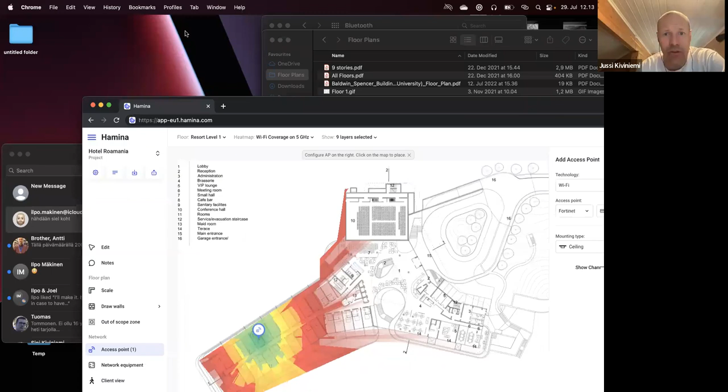So let me just share my screen, and maybe we can work so that I will create a project from scratch, or even a couple of projects from scratch. And anytime you have any questions, feel free to ask, please, because that's how this probably works best. Feel free to interrupt me at any point. Feel free to ask at any point. Okay, so...

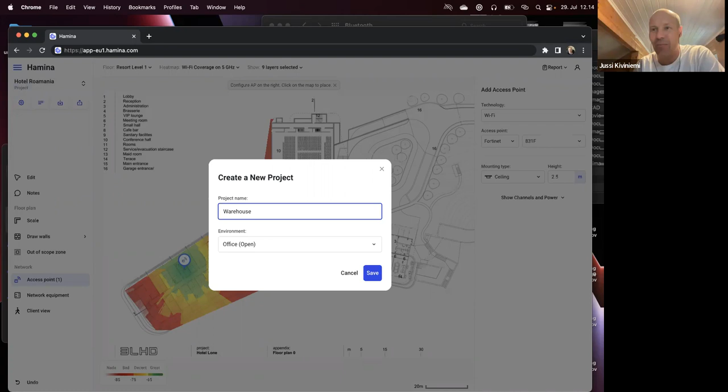I'm assuming you can see my screen, and I will start with tabula rasa, a new project, and we can go from there. We could start with a warehouse, because warehouse gives you a lot of different things that we can show, and then we could also take a look at more like a corporate, typical indoor environment, so that it represents more what you guys do. But let's just jump first into the difficult end and make a simple warehouse plan, and then we'll go from there.

So it's a browser-based tool, it's easy to share projects with other people, for example, for your colleagues. And then you can also, if you only want to share in a read-only way, you can create reports as well that can be either web browser accessible dynamic reports, or Word or PDF documents as well. So to be clear, you don't have to install any software.

You just open a browser and go to hamina.com, whatever, and log in and then start working online. Absolutely, absolutely. And actually, if you go to this URL, you can do that even now. We are in kind of a closed invite-only beta, but if you know where to go, you can actually go here and get your access to the tool.

However, it will have very limited functionality until there will be a button here called Upgrade Now. So if you click Upgrade Now, you just pay 390 euros for the 6-month use of the Wi-Fi planner product, since I'm assuming you may not need 4G and 5G. So 390 euros gives you 6 months full access to the full tool per user. So it's not very expensive.

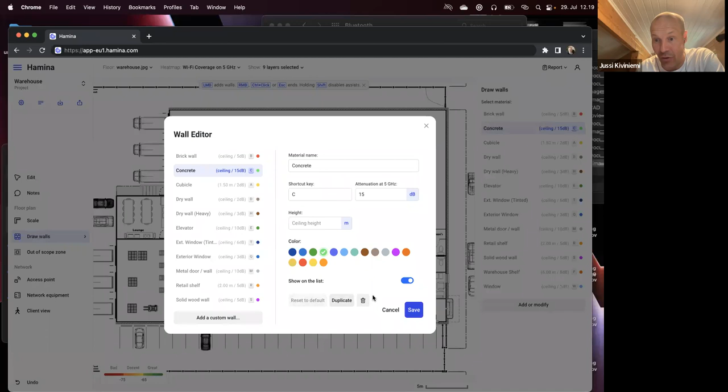Then I can choose the wall materials and start working on it. The wall materials can all be modified—height of the walls, attenuation of the walls, things like that. It all can be fully modified there.

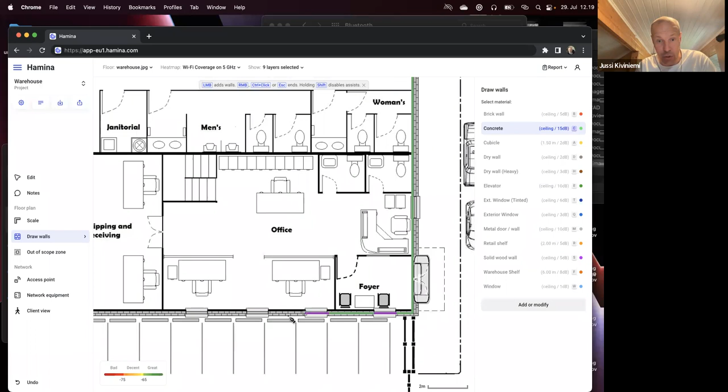If there's different materials here—say there's concrete until here, then this is solid wood, then this is concrete—I can switch between materials super quickly just by clicking these keyboard shortcuts, which can be defined. For example, I press S for solid wood, C for concrete, S for solid wood.

This allows super quick definition of the wall materials. Also, as you can see, this actually snaps to different angles, making perfect 90-degree turns—even finishing up here ends up a beautiful 90-degree turn.

Let's say I draw this line first here with drywall—I hit D to start drawing drywall. I draw a line here, and I want to continue at the exact same place. You can see there's an assistant that tells you your previous wall was there, so it creates beautiful, absolutely 90-degree angles, making this super efficient—clean looking, but also super fast to draw.

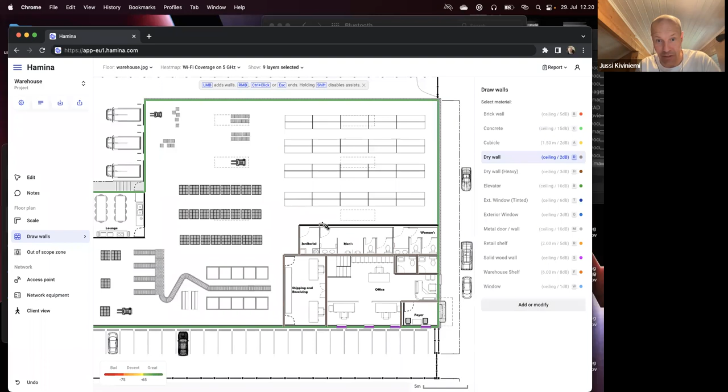So I claim there isn't a faster or more efficient wall drawing tool out in the market than this one. I'm just going to do a terrible job at this right now, but you get the point, right?

So we have some walls defined, and maybe we'll put some here as well to the lounge. Again, you can see how it grabbed here automatically and helped me connect beautifully. Okay, that's done. Then we want to draw some of the shelves, which are thicker than the walls.

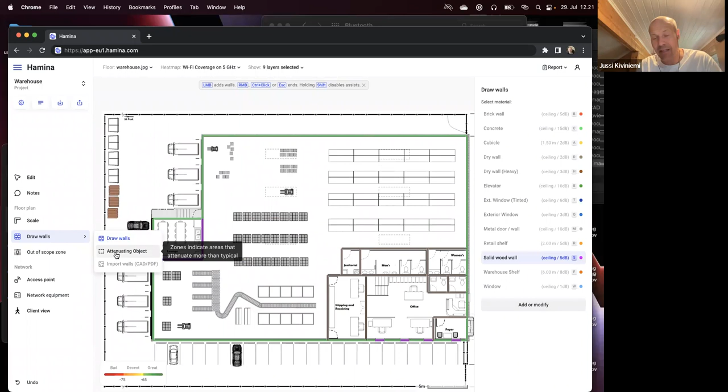So instead of drawing walls, I'm going to do attenuating objects. Let's say we have two heights of shelves here—these about 8-meter warehouse shelves, but let's say we also have 4-meter warehouse shelves. So I'm going to duplicate this material as shelf warehouse 4 meters, give it a shortcut, and give it a 4-meter height instead, maybe a different color too.

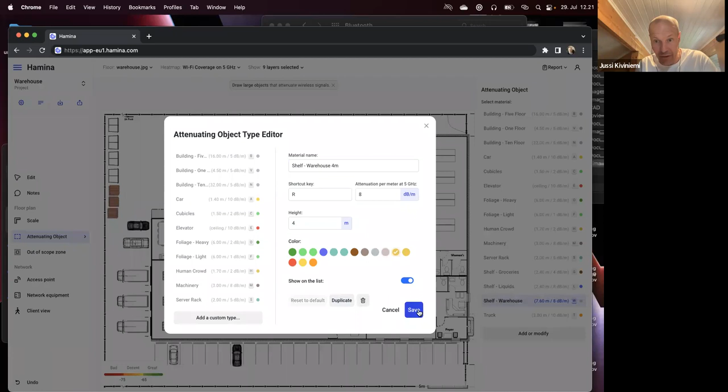Now we have two shelves here that we can use. I'm going to do the 7.6 meter shelves here, and again you can see how it snaps beautifully to the previously drawn shelves, making them very nice. If I want to zoom in—this is at 50 frames per second all the time, although it doesn't show online—it's very, very smooth to do all this drawing, zooming, panning.

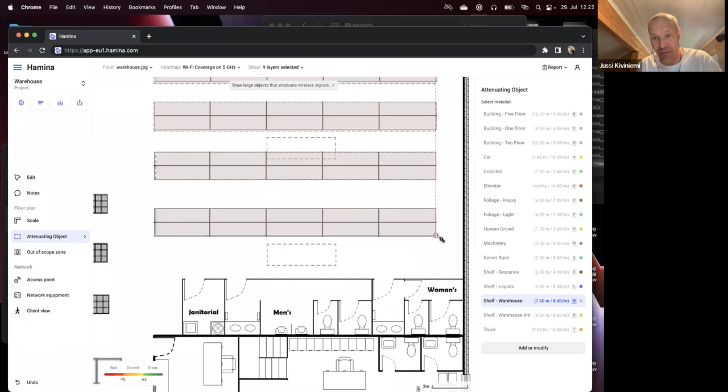Then I'm going to press R to go for the 4-meter shelves and draw a little bit of those as well. There we go. Okay, and then here a couple of shelves, and then maybe these guys are 4 meters roughly as well.

Then I'm going to do the trucks—I'm going to press T to draw the trucks, because we have a requirement, let's say, for outdoor coverage too. So I'm going to draw these trucks here to make sure they don't block too much signal as we do the outdoor planning.

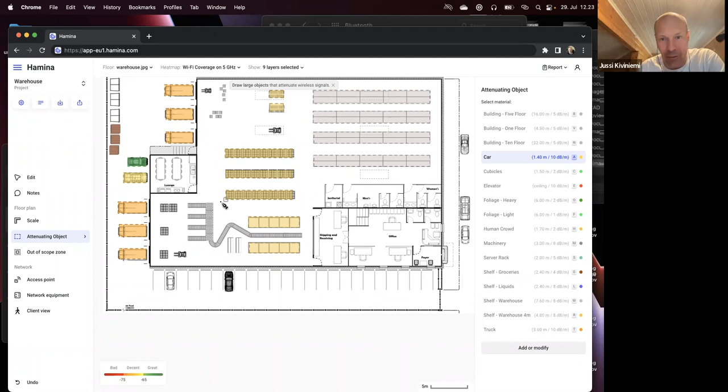All right, and maybe even the cars, if we so desire, not that they would block that much since they aren't that big. You have 4-meter cars in Finland. Was it 4 meters? But remember, the car is only 1.4 meters, and the truck was 3 meters. These are not station wagon Volvos, these are normal cars. All right, here we go. So that's that, and now we've modeled this to a pretty decent degree.

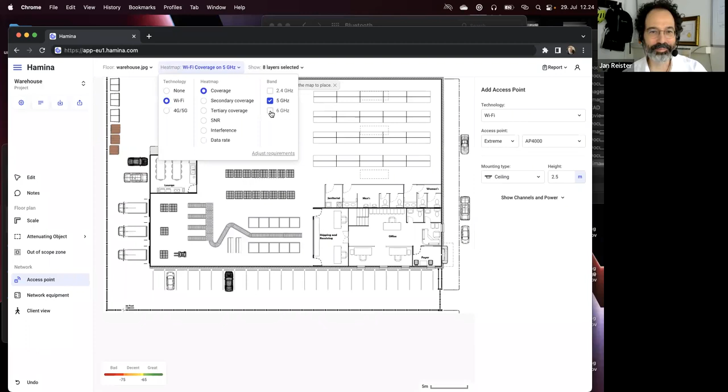So I'm gonna just hide the attenuating objects as well, and then I think we're ready to start placing some APs. Since Jan works with Extreme APs, maybe we could first start with the offices and place some 6 GHz capable AP 4000s there. The 4000, yeah, the latest and greatest, unless you have the 5000, of course.

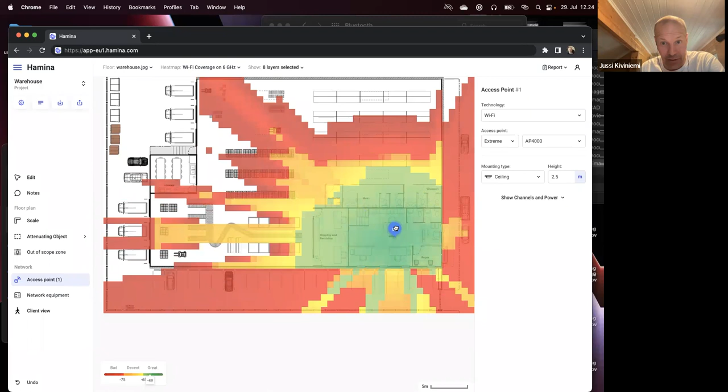We're going to look at 6 GHz coverage for Wi-Fi. There we go, and of course you can see how the walls attenuate the signal, and the shelves here attenuate it even more. Let's put one in the middle of the office, then another one in the lounge office. But of course, we will need something for the actual warehouse space and outdoor areas too.

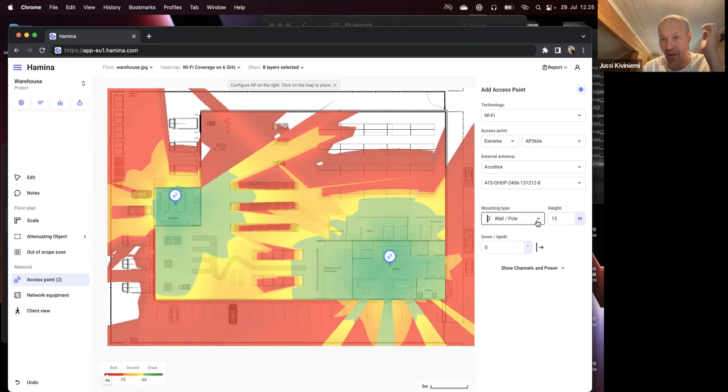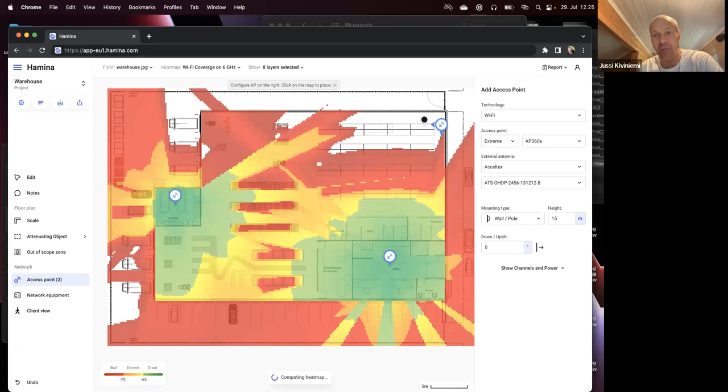So how about we use, I'm not an expert in Extreme APs, but the 360E sounds like it has an external antenna. Yeah, and then we're going to put it at, I don't know, 15 meters height or something, because we can only mount these, let's say, on the walls in the warehouse. So we're going to put one here in the middle of the shelves, and then we're going to point the antenna. But then we see nothing from this AP. Why is that? Because we're looking at 6 gigahertz coverage.

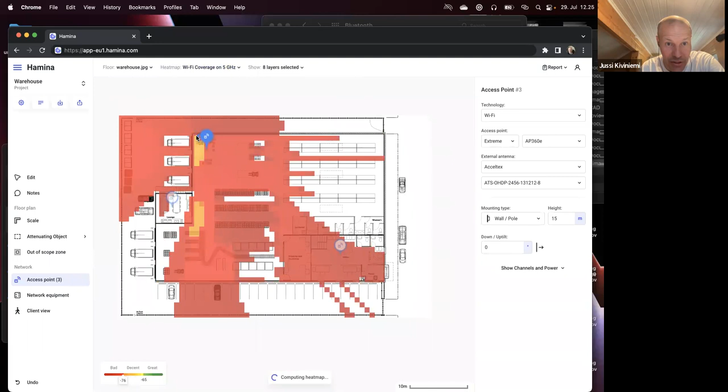So let's look at 5 gig instead, and we can see how this AP shoots down the hallway here. Let's make a bit more illustrative example and move this AP to the corner here where we don't have so many shelves. But don't we have to add an external antenna to this one? I mean, it actually defaulted. Okay, to one of the Acceltex antennas. Great, exactly. So see, when I chose the external antenna AP, it actually gives you the options immediately. If I use an internal antenna AP, it doesn't ask at all, because you cannot use external antennas.

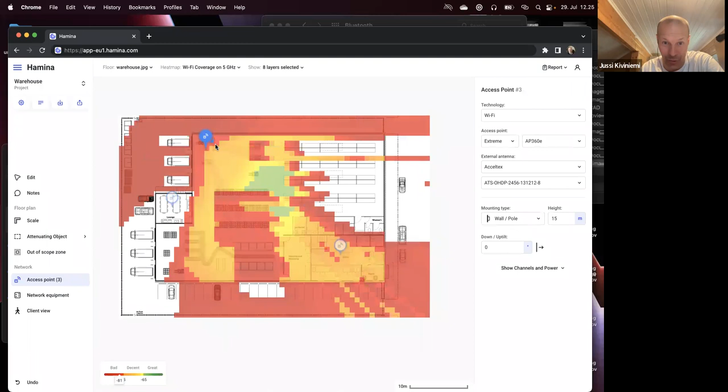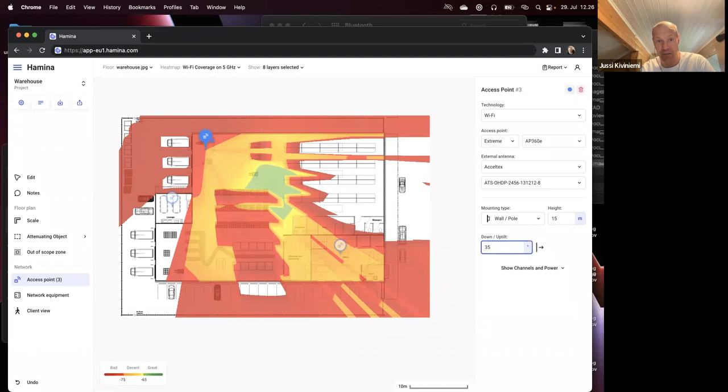And now we can see that since it's at 15 meters height, it actually flies the signals. If it's placed sideways, the signals fly way too high. The signal is great at the ceiling, but it's not great at floor level. So let's give it some down tilt, like a 35-degree down tilt, so that we actually get a signal right below the AP. There we go. Now we can see, sure, the shelves, because they are 4 meters high, remember, block a little bit right behind the shelves, but then again, after the shelves, it starts to look good.

Visualizing coverage for a single AP is pretty easy, you just click on the AP and you can see the coverage for that AP. If we want to see the coverage for 2 APs, hold down Shift, and there we have coverage for 2 APs. If we want to see the coverage for all APs, click anywhere to deselect, and now we're looking at the coverage for all of the APs, all right? And then if we want to...

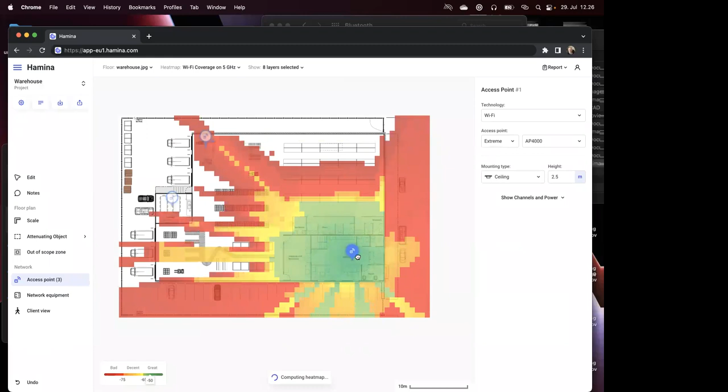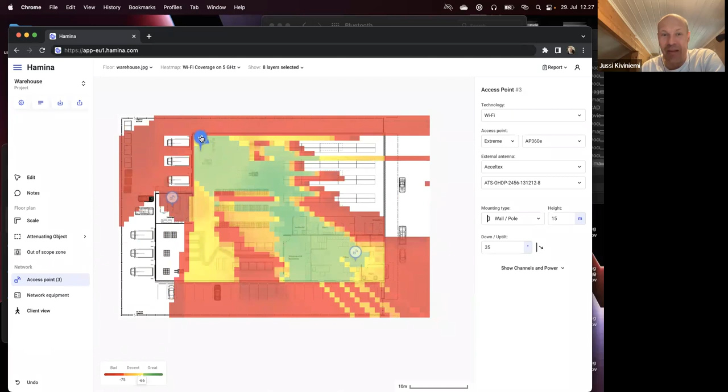Yes sir, sorry, Alessandro speaking. I see that the access points are positioned at 15 meters, or that one, yes? Yes, absolutely, 15 meters, that means like three floors away, upwards. Okay, yeah, I was thinking this is a very high ceiling warehouse. Okay, so that's why I placed it at 15 meters. Okay, thank you. Yeah, of course.

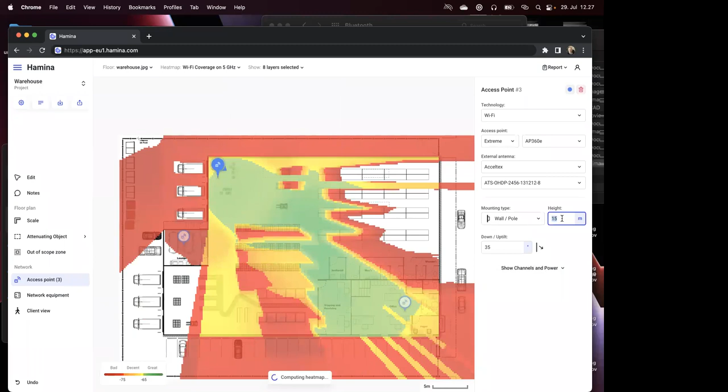And we can put it lower as well, of course. Let's put it to 9 meters. There we go, and then we could reduce the down tilt a little bit. You can see the down tilt arrow here, so it shows which direction it's shooting at any given point.

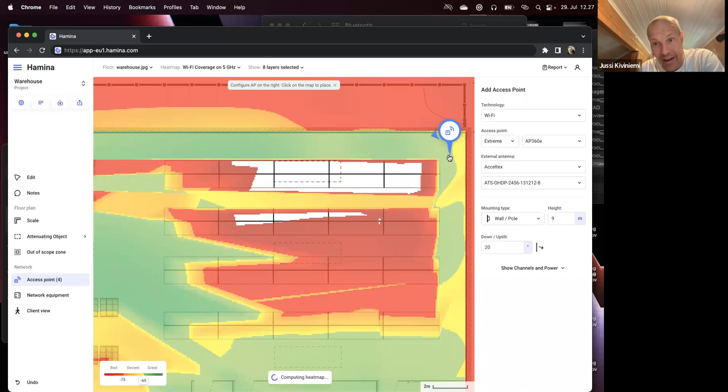Let's place another access point of the same kind, maybe here. And we can see, yeah, the shelves actually block it quite a lot, but if we zoom in, we can see that the signals go between the shelves quite nicely. And as you can see, it recalculates the signal, so even if we zoom in heavily, it still shows crisp and clear heat maps.

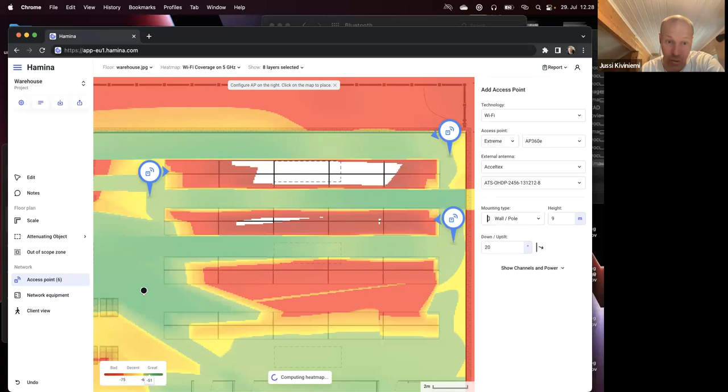So let's put one AP there, one AP again there, and point it that direction. So it remembers the configuration of the last AP you placed, 20 degrees, correct, down tilt, etc. Exactly correct. So now we're starting to see, okay, that's actually looking pretty good.

All right, and of course we can reconfigure any of the APs. We can move any of the APs anywhere, and it gives you an immediate, rough estimation of the coverage. And then if we want to see all of them, that's how you do it.

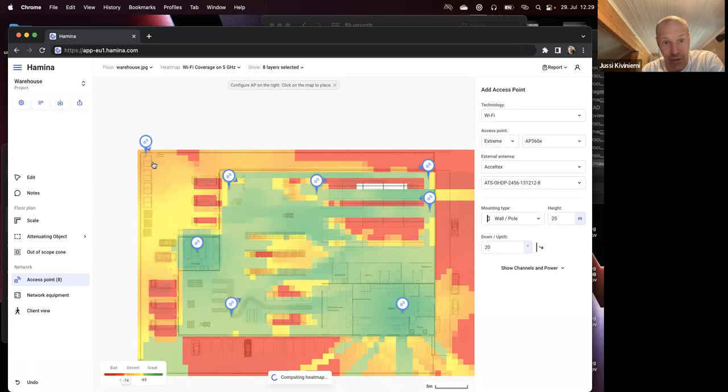And then if we want to place one outside, maybe on a pole at 25 meters, we have a light pole here we could put one on to ensure outdoor coverage. Maybe we want to tilt that down a little bit more since it's so high. There we go, maybe even more down tilt.

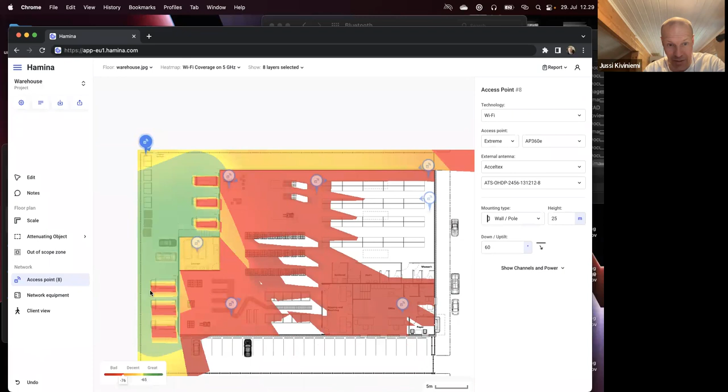Now it covers the yard beautifully. Shoots in this direction, gives a 60-degree down tilt. Right behind the trucks there's a little bit of shadow, but it's not that bad. We can see behind the cars there's just a little bit of shadow, but that doesn't mean anything because the cars are so low anyway. So now it's starting to look good.

And then if we agreed with the customer that only the left-hand side yard needs to be covered, but the other areas not, to get rid of some of the unnecessary heat map, we could say, okay, together with the customer we agreed that the scope of the project is this, so we can draw some kind of polygon here and say we are only interested in this area. So now that's what we're calculating only. It excludes all of the rest.

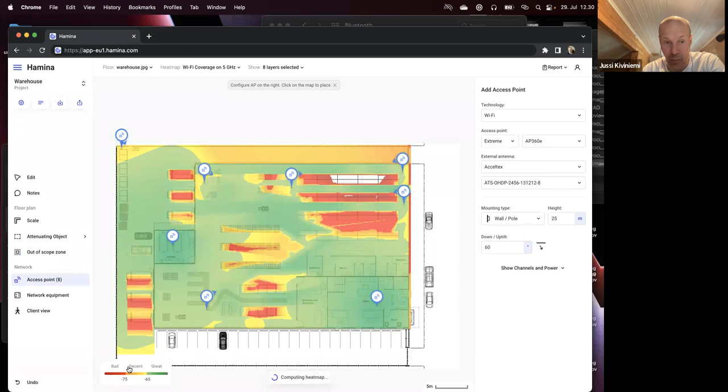And in terms of requirements, we can also adjust all of the heat maps. We can define limits, like what does green mean, what does yellow mean. Great. And this was my next question.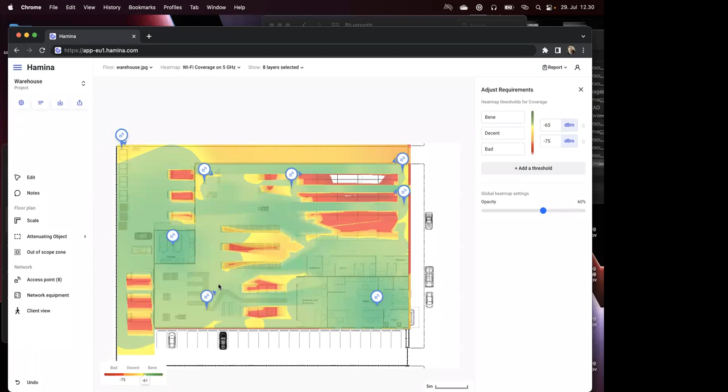And if you want to rename these, that's definitely there now as well. And if somebody is reading the report, they can also see your customizations for the values. And wherever you move the mouse, you can see here also the exact value of the signal.

We can see the signal, we can see where he's connected to. We can see that he's actually quite a bit connected to 2.4. We may not want that to be the case. So what do we do? We could just say for all the APs, let's reduce the 2.4 transmit power a little bit, for example.

The problem especially seemed to be with these guys here, meaning the high-placed APs. So let's drop the 2.4 TX power down a little bit and increase the 5 GHz power a little bit.

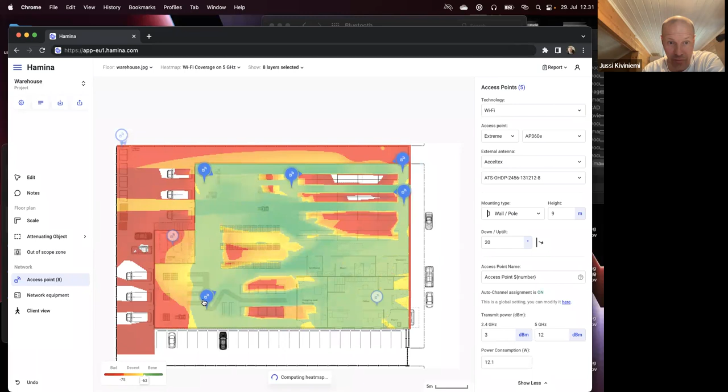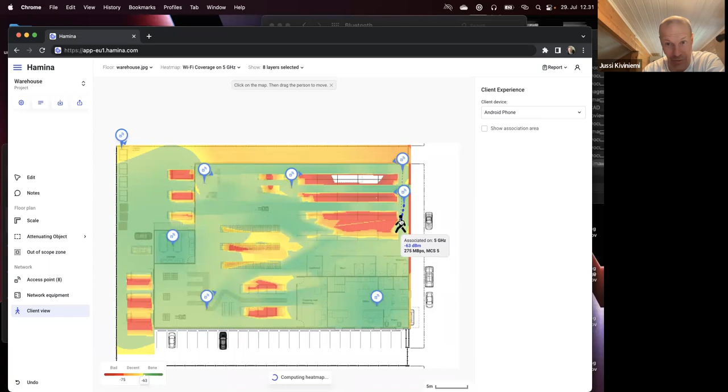And this happened only for the selected APs, which were the indoor directional antenna APs. And now let's look at it again. Now the client is actually associated to 5 GHz, which is exactly what we want. We want as little traffic on the 2.4 GHz as possible. And of course, we could just disable 2.4 altogether if we wanted.

Can I hide the heat maps? Yes, absolutely, let's get rid of the heat maps. Okay, that's fine, great. And now what we can show as a heat map, if we want to analyze the roaming, is the area where the client will stay associated to this AP here.

So it's associated to this AP, and if we actually drag the person somewhere else, like now it's associated to this AP, how long will it stay associated to this guy until it roams again? So if we go here, we can see now it roamed to this AP, and it will stay roamed to this AP unless the user again walks to a white area. Like, let's say he enters this room, and now he associates to the AP obviously in the room.

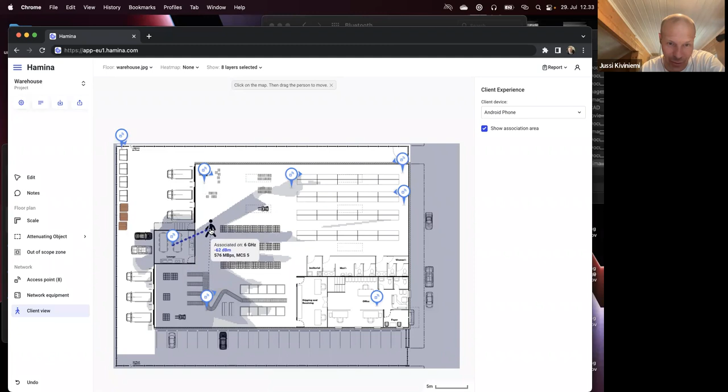So this is a tool for designing for good roaming, but also a tool to understand how the network will actually work and explain to your customers. Explain to the boss who pays for the network, like how is the network going to work? Well, here's how it's going to work. This is you walking around the network, blah, blah, blah.

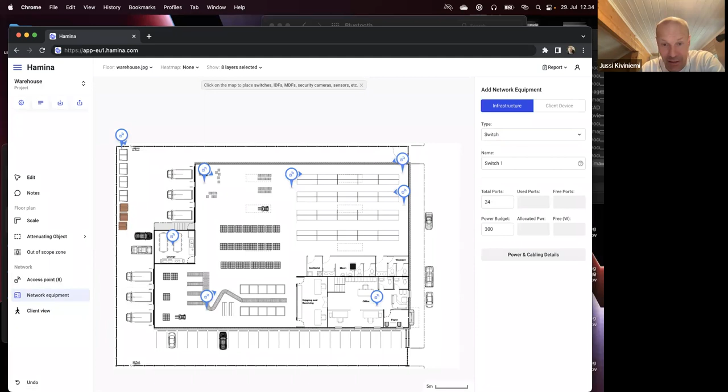All right, and then if we want to also design for switching, things like that, we put a 24-port switch or even a networking closet like IDF, MDF. But let's say we put a 300-watt 24-port switch here in the janitorial area. The tool automatically pulls the cables to the APs and gives a little bit of slack based on the height of the AP and stuff like that. And then we can see how many ports will be consumed, how much power will be consumed based on the actual PoE consumption of all of these APs.

So for example, if we change all of the APs to AP4000s, it will take more PoE power. And then we can see for the switch, for the site, like all the switches on the site, all the APs, the cable lengths, the power consumption. As we can see, the 4000s consume more power than the 360Es, for example, how much cable you will roughly need, all of this stuff.

Is it possible to control the cable path? For example, I know there's a conduit and it's actually a different path than the one that is depicted here.

That will be possible in the future. Everybody asks for that as well. So absolutely, we will make it. Because, you know, I could really propose this to a colleague of mine who does cabling and nothing else. Yeah, and I mean, it's something interesting. Absolutely, and we should probably talk with your colleague and ask like what would be needed for this tool for this to be usable. So, you know, maybe we could have a conversation with him as well.

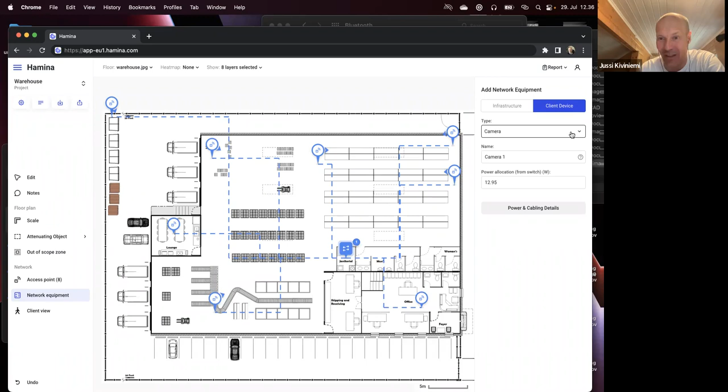Okay, because the reason we haven't made it very configurable yet is we don't know much about like the cable guys and what kind of tools they use today, and maybe they prefer their existing tools and things like that. But at least this works for calculating the power budget and the port budget and rough amount of cabling and stuff like that.

Okay, and then if you want to put in a requirement of putting security cameras that also connect to the switch into the office as well, we can definitely put those as well. Or if you have something else like, I don't know, PoE powered speakers or environmental sensors or desk phones. Certainly one desk phone here in the lounge, one desk phone here and here.

Then all of that will be shown also on the switch side of things, and it will be shown here on the breakdown of switching and power details. And if you want to put in more switches, no problem. Maybe you want a switch also in here, it will reroute. And then all of this will also be shown on the bill of materials. So with a click of a button, you can get a rundown view of everything that needs to be ordered.

And this is configurable too, so all of this is highly configurable. So you can use this as a proposal for the customer on what to order, or a proposal for the boss, like this is the gear that I will need, and maybe this is the price that needs to be paid.

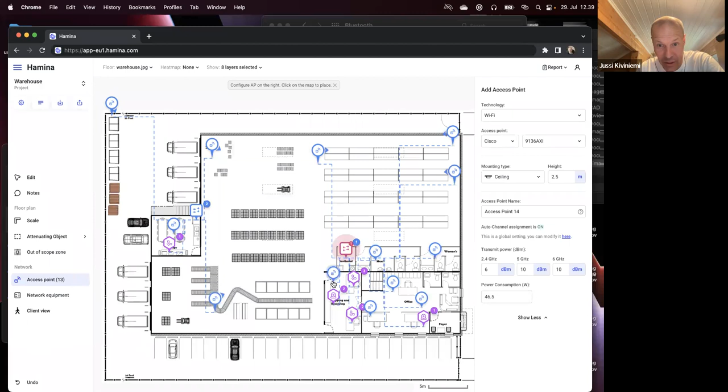I totally agree, and especially with 6E, Wi-Fi 6E access points, those tend to draw quite a bit of power, and especially if we start putting in things like Cisco 9136s with all features enabled, once you connect a few of these to your switch, you can see that, oh, that's actually running out of power now.

Wow. And same thing, if you put the AP too far away, it will show, oh, that's actually too long of a cable. We have an 80-meter safety margin here. So these kind of things automatically will be flagged as potential problems.

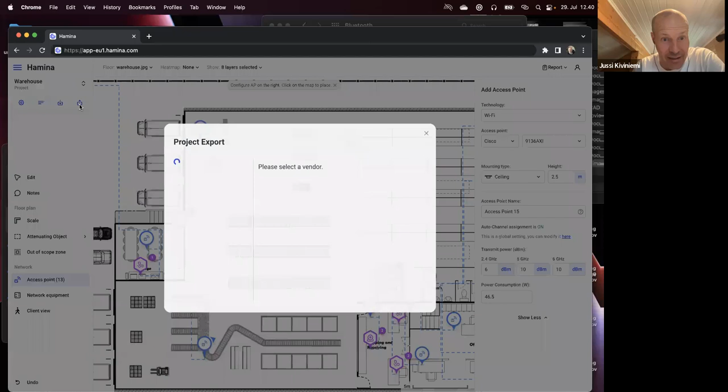So that's it, and then if you want to push this configuration into your Extreme system, you can just hit Export Project, take Extreme Networks. Let's see if I have an Extreme credentials here.

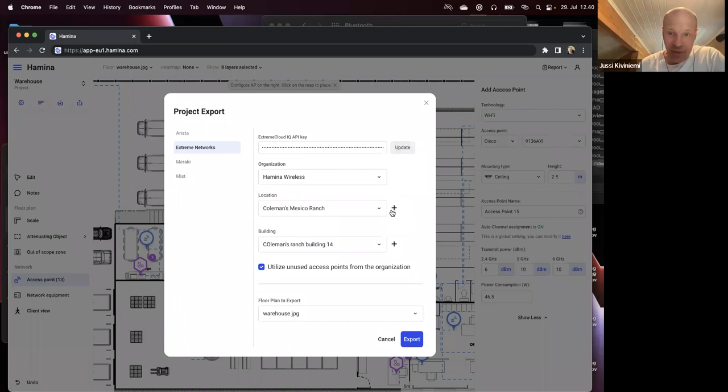It will automatically grab the information from my Extreme Cloud IQ system, the organization, the locations. We can see Dave Coleman's Mexico Ranch, which I've pushed previously. You can create directly in Hamina new locations for your Extreme system, create new buildings in your existing location, give them addresses, and export this directly. It fires up a new site in your Extreme system, takes the access points out of inventory, puts them on the site, uploads the maps, and places the access points on the maps automatically. With a click of a button from Hamina, you don't need to do anything in the Extreme system.

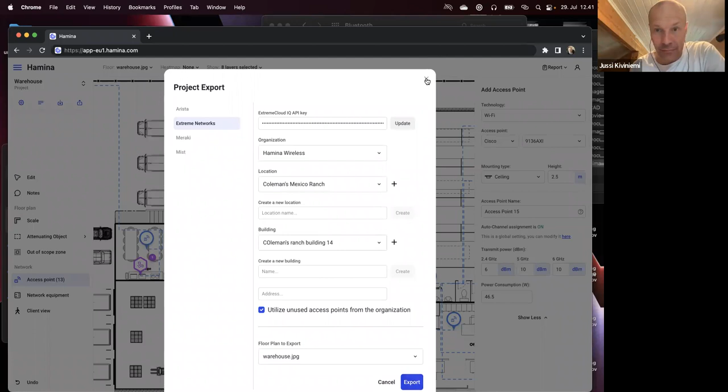That's very interesting. We're trying to make the workflow as easy as possible for you guys with these export and import capabilities built directly into the tool. That's the power of natively cloud-built tools, right?

So that's an example warehouse plan for you.

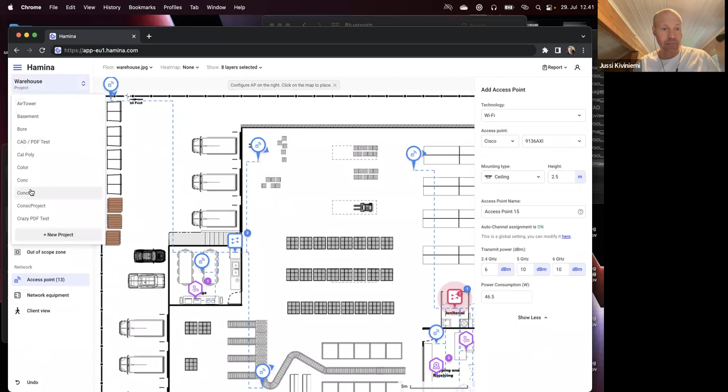In the interest of time, I'll create a quick university plan as well, if you don't mind. This would resemble more of a typical office or indoor environment. I'm just going to drop in — some of you may have seen this in a demo too — a PDF floor plan you could find by Googling, or try your own.

So what happens here is I'm dropping in, I think, a 2-page PDF, one page per floor. It says the first floor plan is ready, and you can see in the background it loads the rest of the floor plan. So we can already start working.

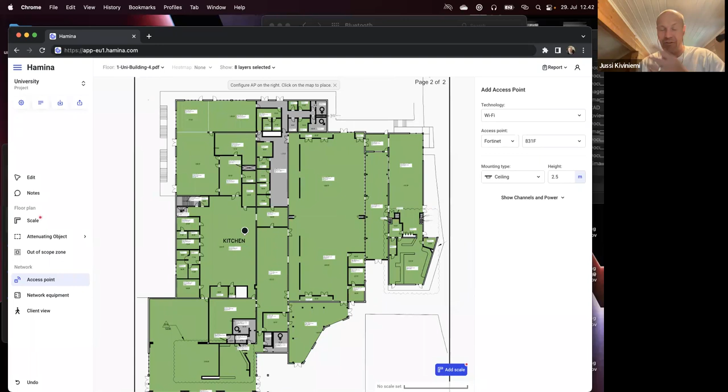It does a lot of things in the background — for example, the heat maps are calculated in the background. So you can continue working even if you have a big project and the heat maps are still calculating. No problem.

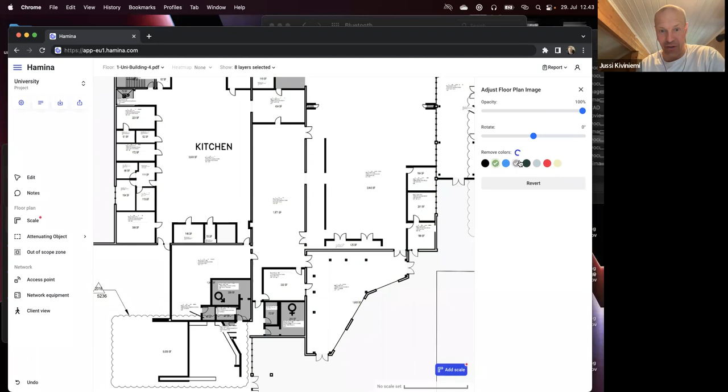This map is terrible because it has green and gray colors, so let's adjust the map and get rid of the green automatically. You don't need to open this in Photoshop or ask for a cleaner map. We've automatically scanned the primary colors of the map, and we can get rid of colors like this gray with a click of a button. It processes the drawing and removes the green and the gray, so this is now more ready to start working against.

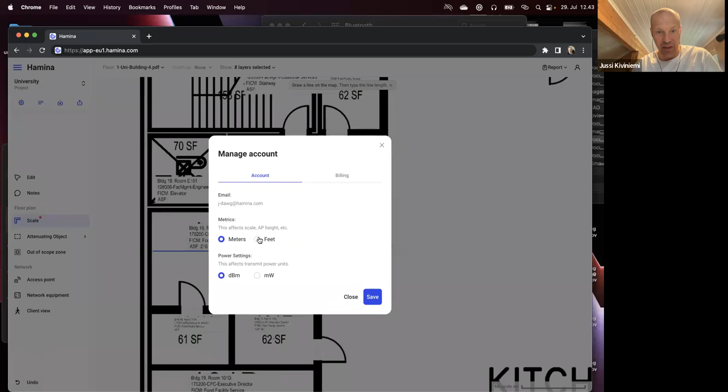Then we just put in the scale, and this is in feet. I know this is 20 feet side to side, so I'll click the meters button, put it back to feet, hit save, and set that to 20 feet. Now it's almost ready.

We probably want to include the main walls as well, so instead of drawing walls or objects like shelves, we're going to import walls from this PDF. It's a messy PDF, but we can work with it. We'll say these walls here are drywall, there are some doors which we can set as drywall or solid wood door, and there are clearly some windows we can use as well. All right, this looks pretty good.

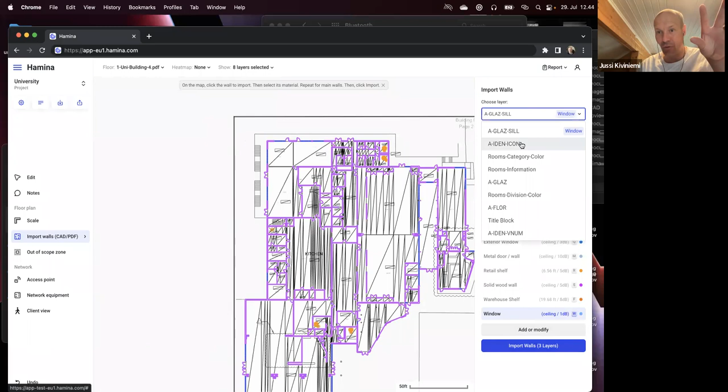We didn't need to go through all of these layer names, which I don't even know what language they're in. You just select some objects, connect them to the layer, and it applies the material to the layer.

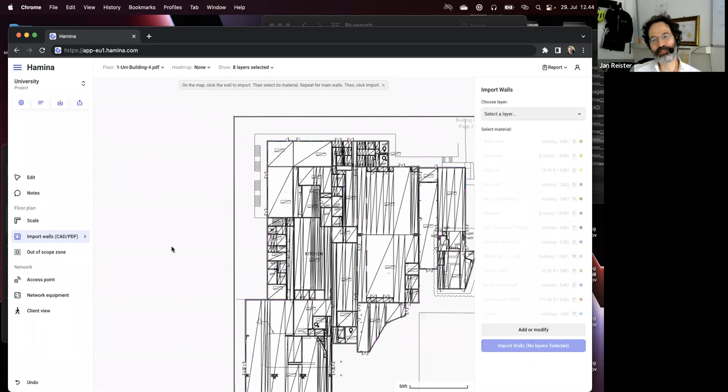Exactly, this is great. You should actually be selling this tool because you're explaining it much better than I am. Why not? I've always dreamed of living and visiting Finland. That would be great, that sounds great. I'm not kidding, you're anytime welcome, sir. You're anytime welcome. Thank you.

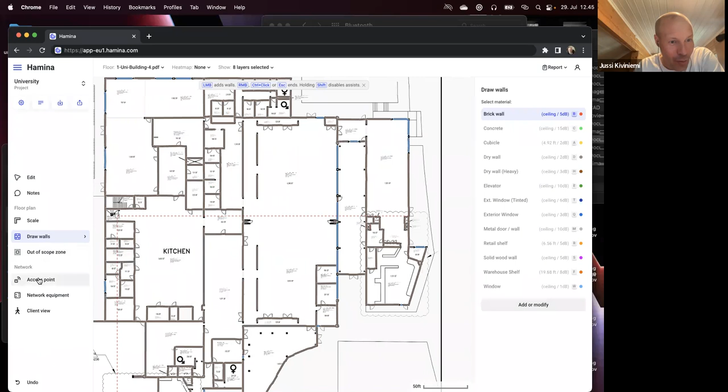Here we can see it actually did a pretty perfect job drawing the walls automatically from the PDF, right? So now we're ready to start working against the floor plan.

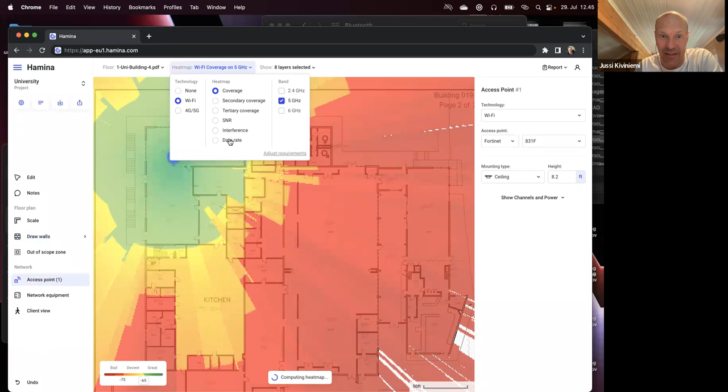Same thing — we place an AP, take the Wi-Fi visualization, and there are different options: data rates, interference, SNR, all of that. It now takes into account those walls, which took us all of 5 seconds to define for this building, and we can adjust them later using the manual tools if we want.

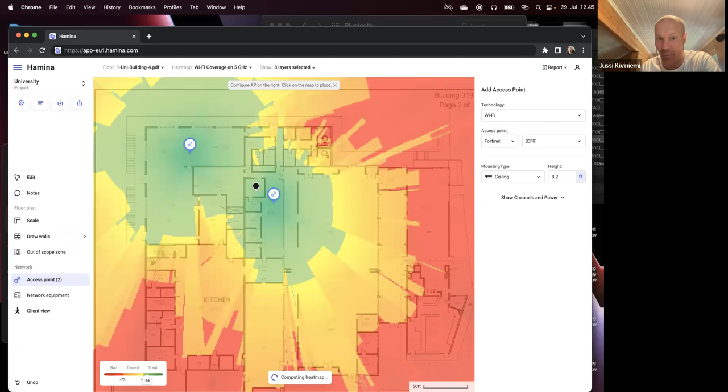For example, if we thought that drywall is probably a bit thicker, let's give it some more attenuation — no problem there. We'll just give it some more attenuation, and it will be applied across the entire floor plan.

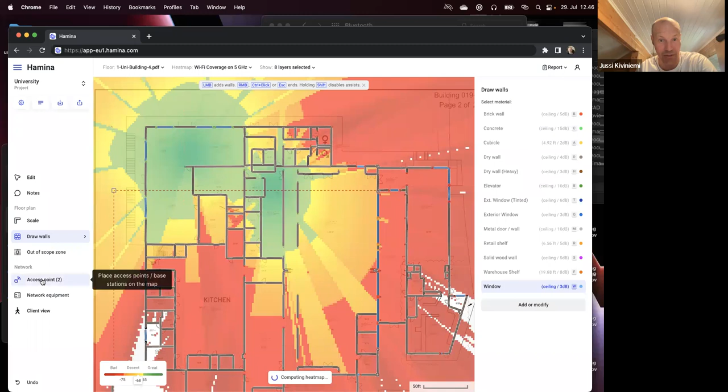Or the window, actually, that's not a 1 dB window for sure, since it's an external window. So I'm going to say it's a 3 dB window, and boom, it immediately made a difference to the coverage map.

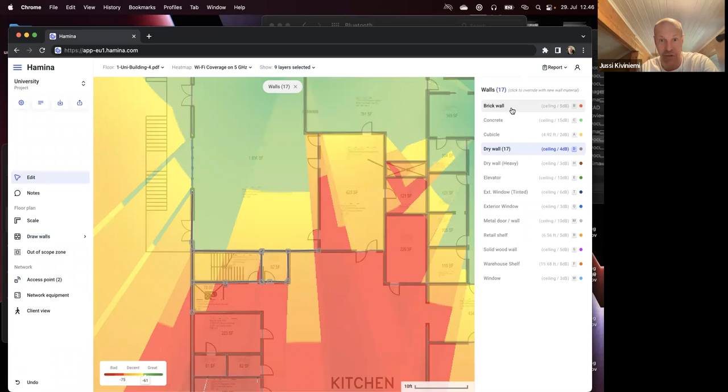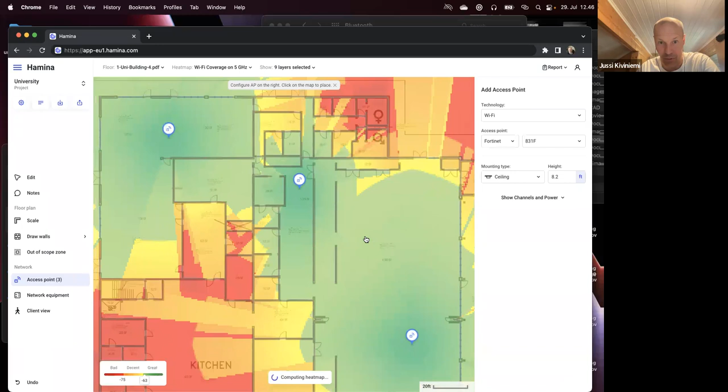So if I wanted to, for example, say there's a staircase here, so that's a brick wall. No problem, let's just enable the walls. I'm going to draw the brick wall here, or select the brick wall area and change those drywalls to brick wall. Immediate effect.

So that's how you make an indoor, like a simple indoor floor plan, including the walls, APs, things like that. I think that's the tool in 45 or 40 minutes or 35 minutes. Of course, I didn't show nearly all of the features.

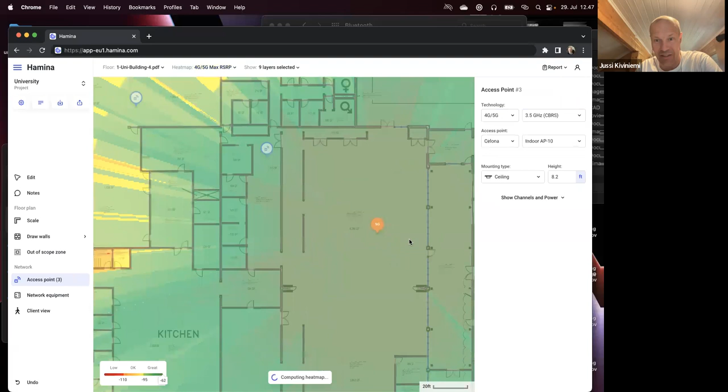And maybe one thing I could show is the 4G, 5G planning. Usually 4G, 5G planning is made into this thing like, oh, it's something totally crazy different and way complicated. Is it really though? I mean, it's still signals. It's just using a different band, different antennas.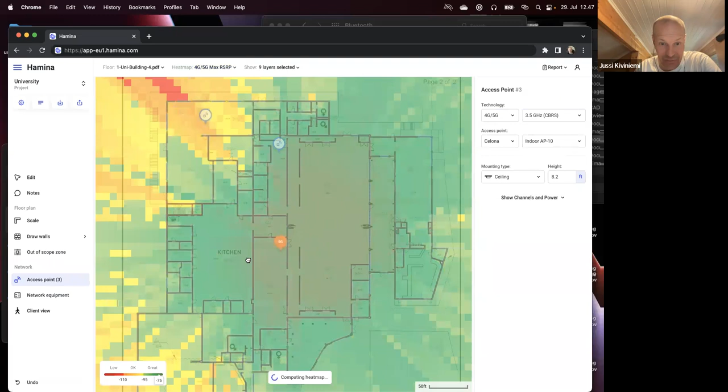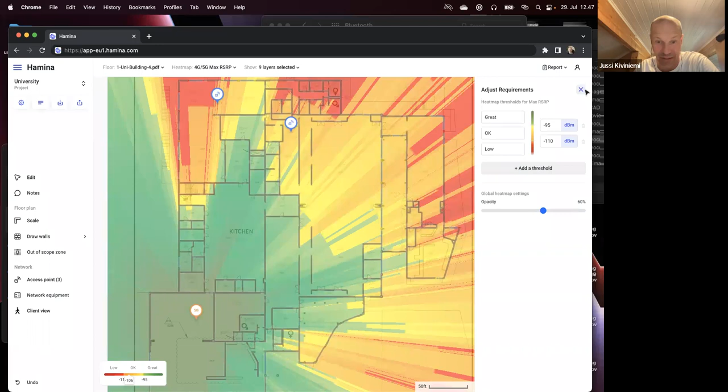And we have modeled, for example, the Celona 5G, 4G access points in 3 dimensions. It's actually pretty similar stuff, just different metrics like RSRP and SINR. And similarly configurable here, of course, just slightly different thresholds because the protocol and PHY are a bit different. But you get the point, right?

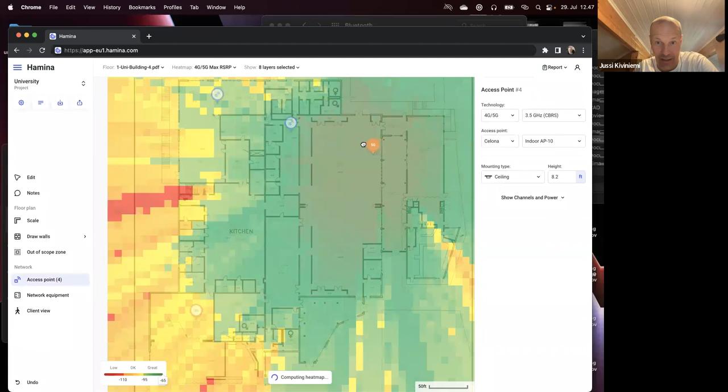The difference is, I guess, the coverage is a lot greater, for example, on 3.5 gig, because the transmission powers are greater. The protocol works a little differently, so we can accept much lower values as acceptable signal. But it's also ready like this for 4G, 5G planning, not just Wi-Fi planning.

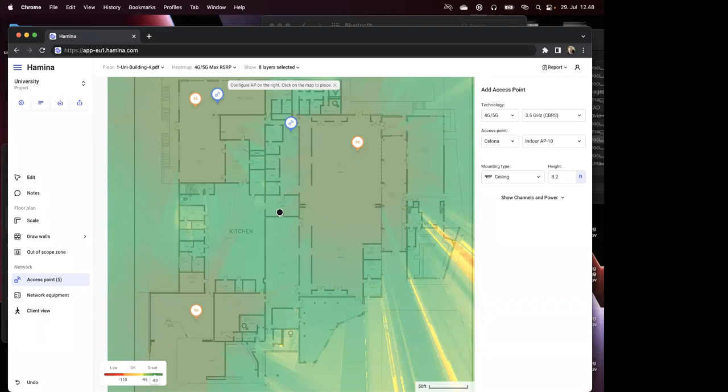Oh, I'm burning with questions. Oh man. Okay, let's start with 5G. How's the tool working with planning for 5G in large outdoor areas, say a campus?

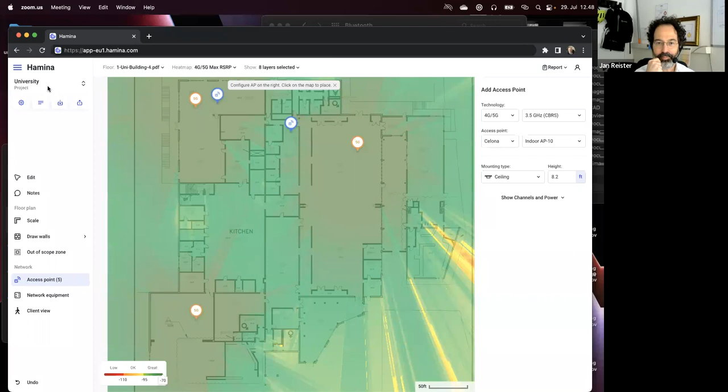Because in large outdoor areas, you have buildings, they are 3-dimensional, they are high, and you don't see 5G indoors, at least in Europe normally. But you can see that deployed locally in open areas in campuses. So that's one question. Absolutely.

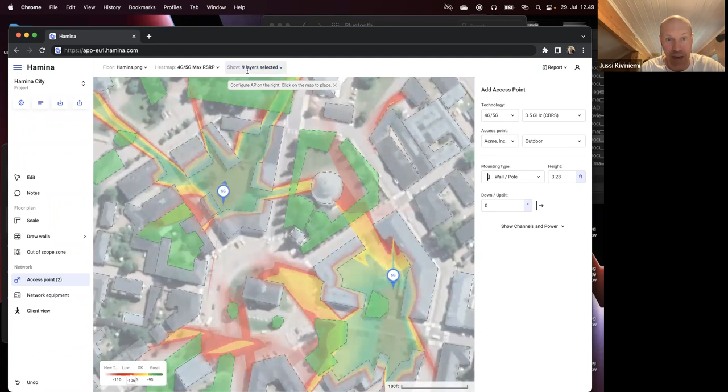And by the way, it took me like 5 or 10 minutes to model all of this part of the city. Same thing, essentially, you move the AP, you see the coverage. Let me just get rid of the attenuating object so it's clear to see. But it's essentially the same thing.

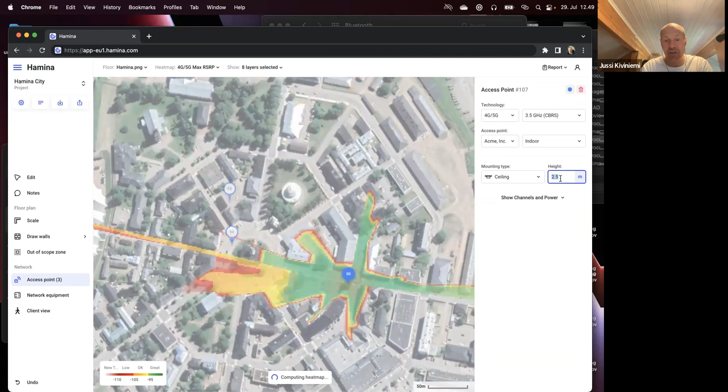If we wanted to use, I don't know, an omnidirectional antenna, no problem there. And this is at 3.28 feet. If we wanted to put it back to meters so it's easier to understand, if we wanted to put this at 12 meters height, so it goes above most of the buildings, we absolutely can. It gives, of course, much better coverage for 4G, 5G compared to Wi-Fi.

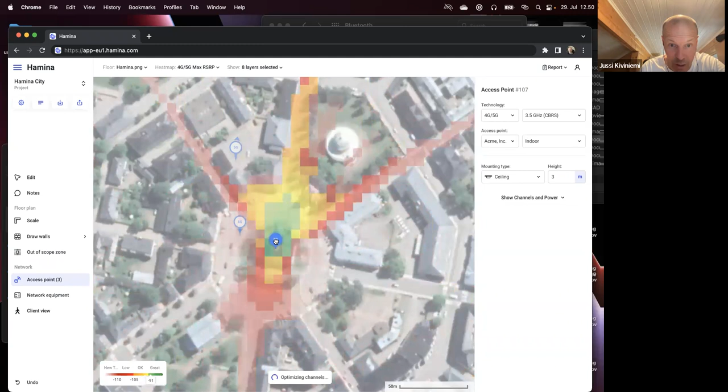But you can also, of course, do the same stuff with Wi-Fi. But you can see how the buildings, the trees attenuate the signal. If you put the AP inside the high building, and certainly if you put the AP at a decent 3-meter height in the building, it doesn't go out very much, which is exactly how it would work normally, right? But if you put it outside, it will radiate through the streets, and things like that.

Can I put an antenna on top of a building? Absolutely. Let's put this antenna on top of the building. So put this one to, I don't know, 20 meters height. Actually, I'm going to say it's outdoor, so we make it directional, 20 meters height.

And here we can see how it shoots as we align the antenna. We can shoot it above most of the buildings, as you can see. And then we can, of course, tilt it down if we want. If we want to raise it even higher, like 40 meters on top of a humongous pole, no problem there. We want to give it some down tilt to give better coverage right underneath. But yeah, absolutely.

Okay, great. That's very interesting. And another question, I mean, another topic is 3D modeling of buildings.

So can I simulate floor plans in different floors in a building interacting with each other? And another thing, can I leverage the AutoCAD 3D functionalities in creating 3D buildings? So not using floor plans one by one, but just using, in the projects that support it, the full 3D rendered model.

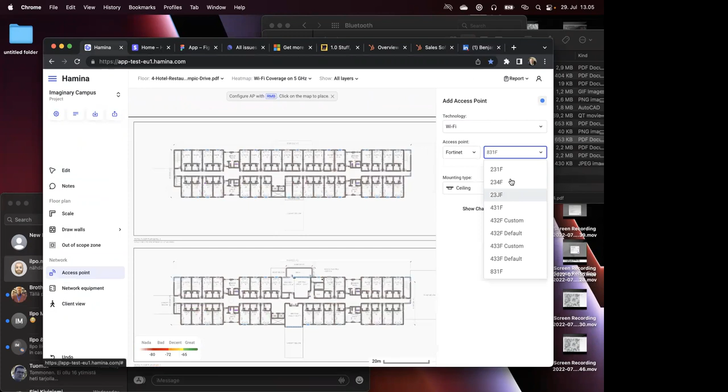Okay, absolutely, because the current project is with them, and we have not yet defined who's gonna do this task, and Hamina could be a really great opportunity. So that's why in the chat I said I just registered, because I'm very enthusiastic about it and need to talk with my customer to try to convince them that this could be a very good opportunity to have a good wireless plan.

So just - I'm amazed, I would say. That's it.

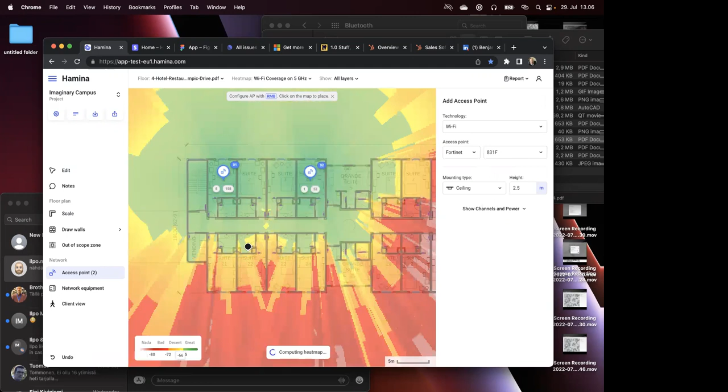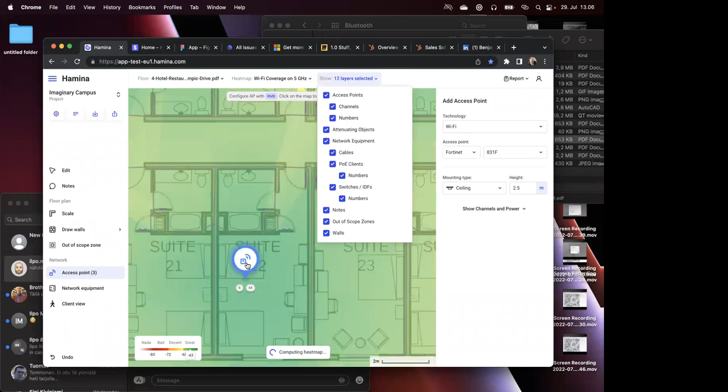Beyond the calculations that are of course required to do the modeling of how wireless waves propagate, all the other ease of use - sorry, I forgot the name, sorry, because I don't see the names on the screen, but you see, right? You see, yes, okay, correct. That makes the tool very great. So very, very great job.

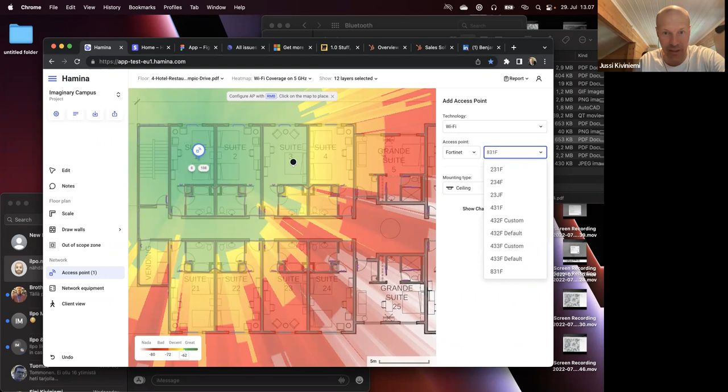Thank you so much, we will tell the R&D who have really worked hard on the product. And here's the Fortinet APs as well. By the way, I enabled channel numbering here on the screen, so you can see that as we place APs, it automatically optimizes the channels to kind of simulate the Fortinet radio management system at the same time as well. Okay.

I will share the link of this meeting with my customer, so he will see that the 831F are modeled and it's ready to be used. And we are working very closely with Fortinet, including their European team as well as their California team. So anything you need in terms of access points or antennas, if they are missing, we can very quickly add them here as well. Oh, that's good news. Yes, thank you very much.

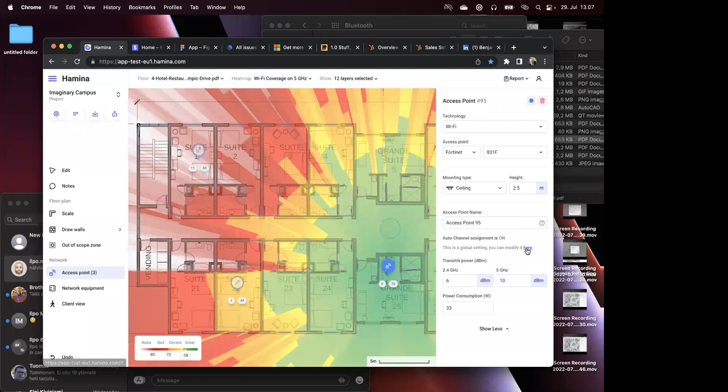Is it possible to add a custom access point if I upload, for instance, the RF map of the antennas? Good question, Dario. It is not possible currently, but we can very quickly add that for you. Just send us the specifications of an exotic access point that we don't have, and we will add it for you in the actual public product.

Great. And maybe just a question - so you said that all data are kept in read-only mode now if the license expires. What about export if at a certain moment the client would like to have it with him? Maybe I was off 5 minutes because I didn't realize my laptop was on battery, so I had to reboot it - maybe I missed that part, I don't know. But if you could spend some words about it, that would be great.

Absolutely. So let's say your license runs out - your client will still be able to access the reports of the projects, and you will be able to access the projects in read-only format as well. You can actually add notes and things like that to the project even when you don't have a license. The only difference is wall drawing and RF network planning features will be disabled, but otherwise the projects will stay there. We will not delete them from you unless you tell us to delete them.